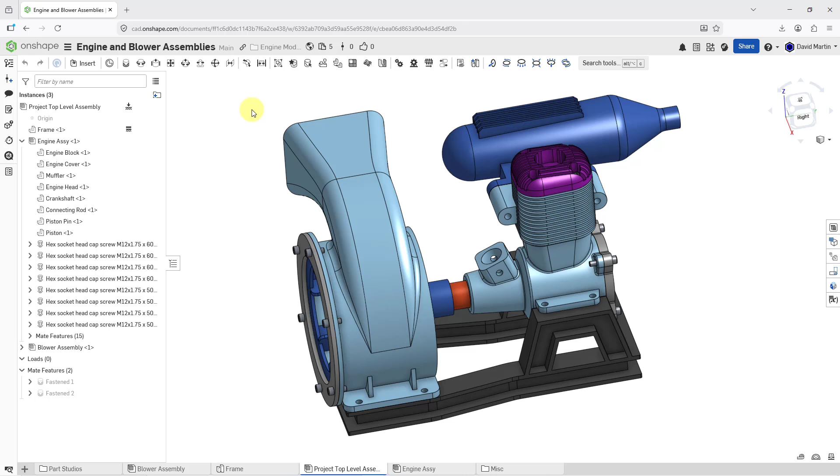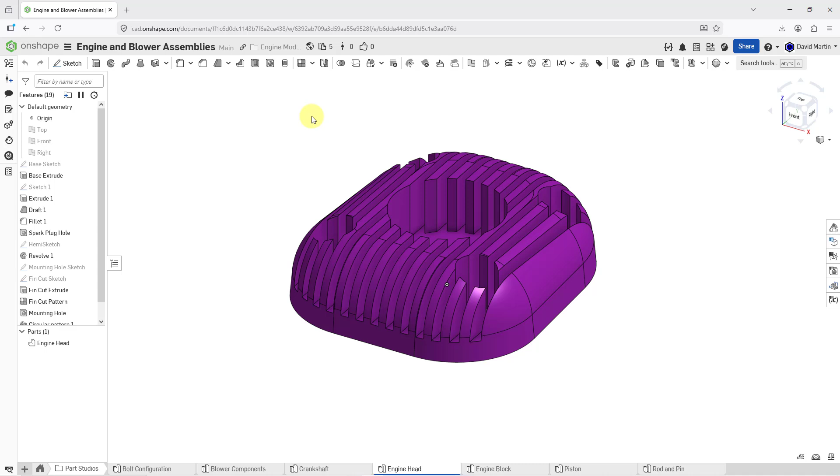So the first thing that I need to do is go to the part studio that contains the engine head. Let me go to my Part Studios folder at the bottom of the screen. Here is the one for the engine head. I will click on it. Now I am back in the environment. And so let me turn on the display of my planes, and so that way I can figure out what plane I am going to sketch on.

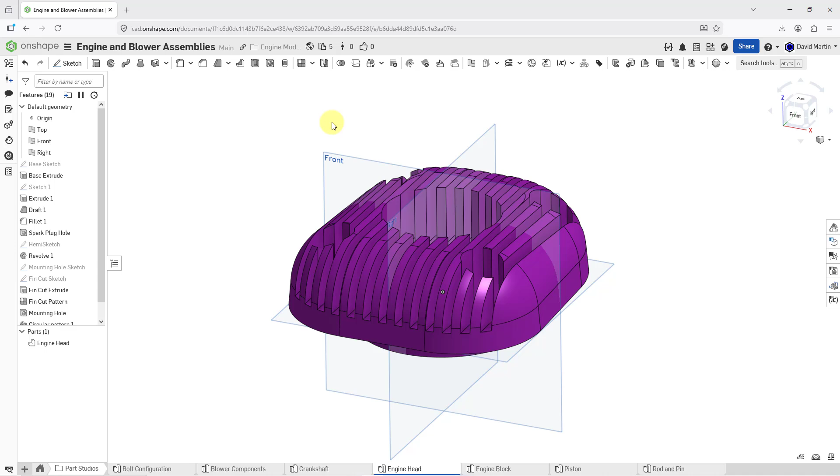And by the way, this part's going to be fairly easy. It's a couple revolves and extrude, some chamfers, not too much involved in this. But for the first feature, let me make the engine head a little transparent. That'll make it easier for me to see inside. And then I will select on the plane called front, right mouse click. Let's create a new sketch. And then I am going to view normal to the sketch.

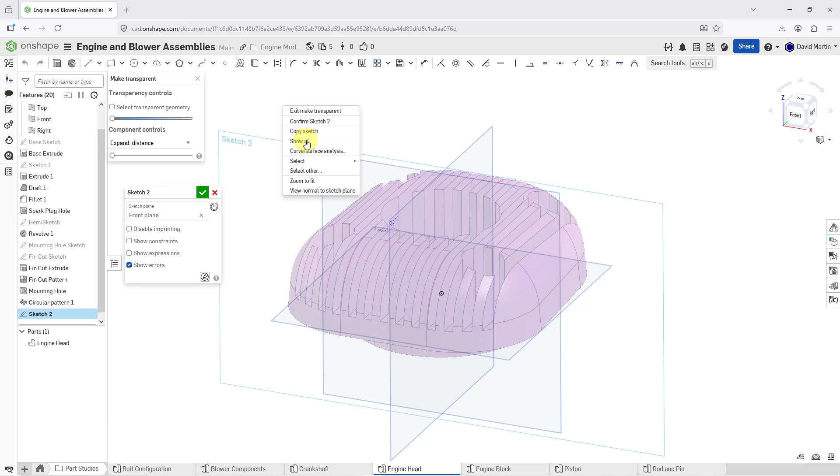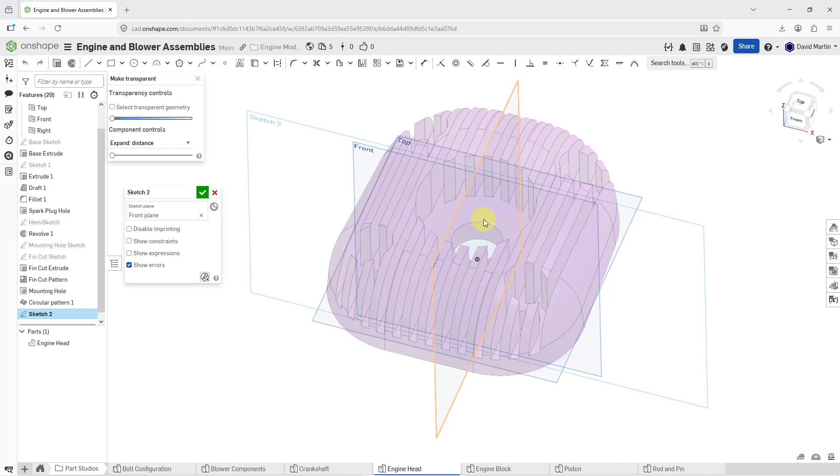And so the engine plug is going to go in here, and I need a surface that's going to end up being level with where the bottom of the cuts are. If I rotate the model, you'll see that the bottom of the cuts is the same surface that the hole is in over here. So let me go to view normal to my sketch plane.

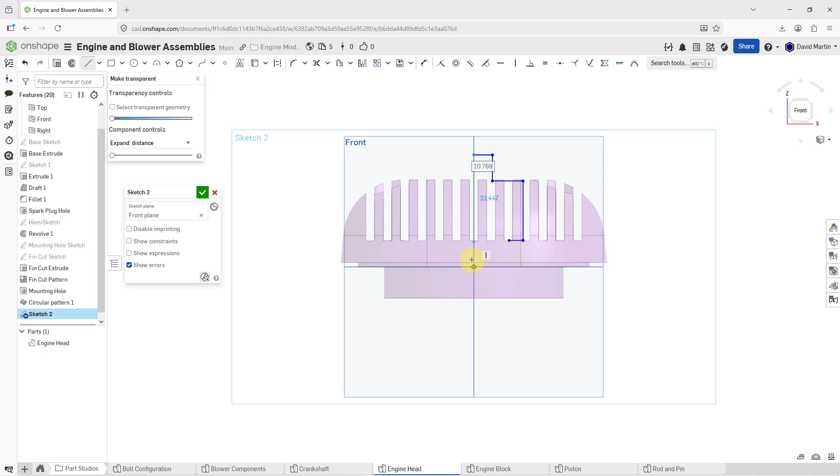I'm going to sketch a bunch of different lines. Let me click on the line tool, and we need a horizontal line out over here, and I'm just going to eyeball it. I'll add some constraints later on in order to put it in the right place. And then this is going to go up a little bit, then this is going to go in, and we're going to have a narrow top, and then here, and then go down, probably about yay tall. And then to get it to lock into the first line, I'm just going to hover my mouse over to give it focus, and then I can left click and then left click again. Let me hit the escape key to get out of line creation.

And this is going to be revolved, so let me throw in a center line. It'll also help with some of the different dimensions I want to create. I will go to construction mode. Let's create a line, and I'll let it snap into the origin, and I'll just make it vertical, and then hit the escape key. I'll also use the keyboard shortcut P to turn off the display of my planes, just to make everything a little bit easier to see.

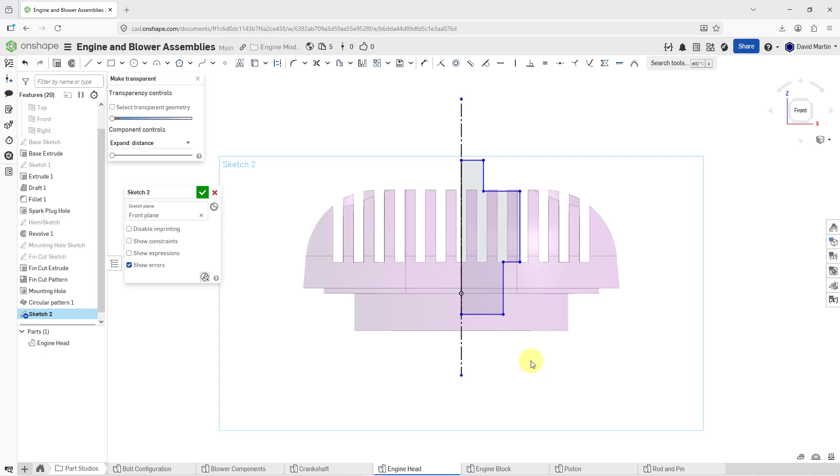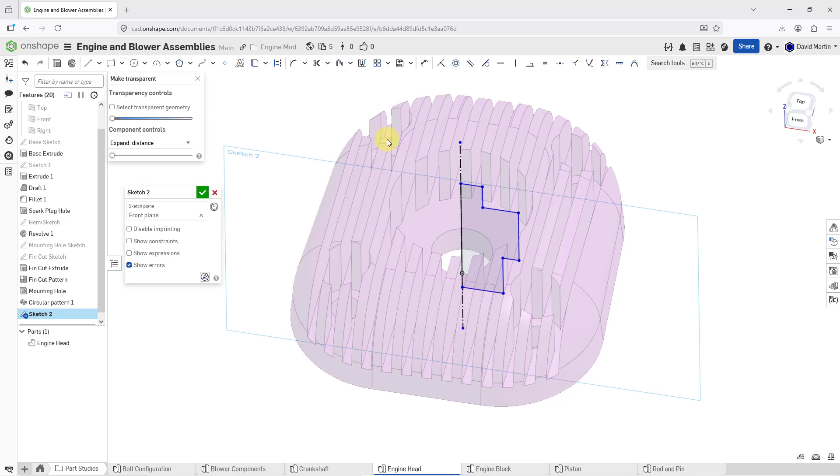The next big thing I need to do, let me throw in a coincident constraint so that this line lies in the same surface as here. Now, one thing you'll note, if I try to go to coincident and pick the line and then the surface, I'm not getting anything, and that's because I'm in transparent mode. Let me hit the escape key once more. I'm going to turn off transparency for a moment. That is really quite a bright purple.

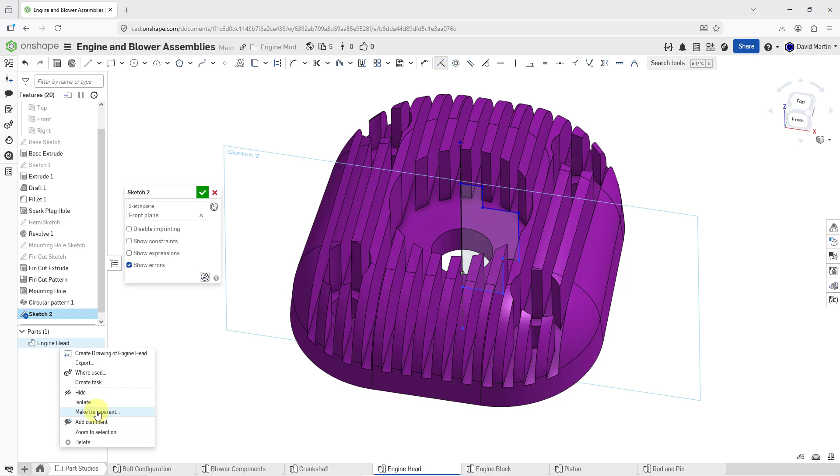Let me go to coincident and then pick the line again. And now you'll notice the surface is highlighting. So that is good. Now I can right click on the engine head and make transparent once more, and right mouse click and view normal to my sketch plane. Let's throw in our dimensions.

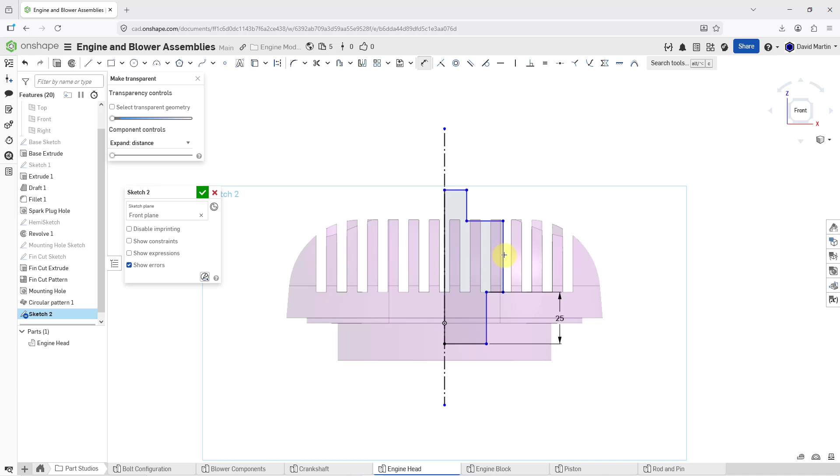So for the different dimensions, I need the height of this line. This is going to be 25, and I got it almost exactly. I wasn't even paying attention to the values. This one is going to be a height of 30, not so close there. And then the overall height, this line, is going to be 72.5. And now we need some different diameter dimensions.

And so for the diameter dimension, I'll pick this line and then the center line. And by moving my mouse over to the left, here I'm getting the diameter dimension. This is way too big. Let's change that to 14. And then down at the bottom, let's click this and then the center line.

And then my dimension here is going to be 30. And then the last dimension is going to be the width here. Pick the line, pick the center line, move out to the left. And this is way off. Let's see, that needs to be 37.5. And that is good. So that is the basic shape.

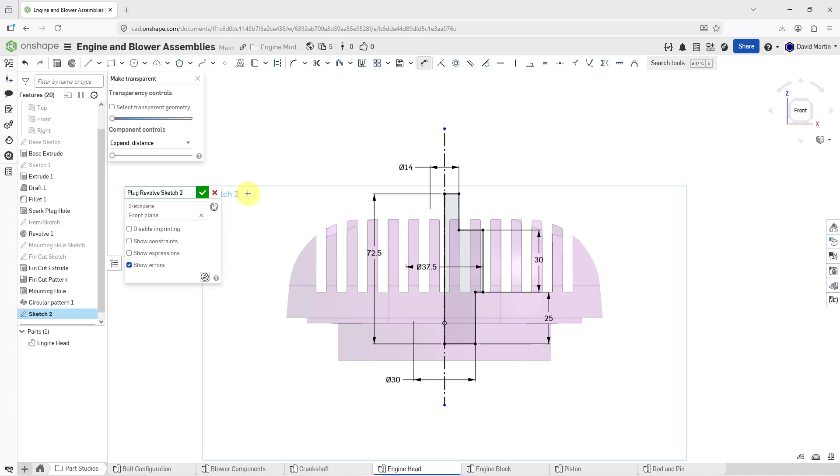Let me edit the name of the sketch. If you take a look, I've got some of the features named in here, but I could have done a better job. Let's hit the pencil icon. And this is going to be, let me call it the plug revolve sketch. And get rid of the number 2 on the end there. Hit the check mark. And so this is good.

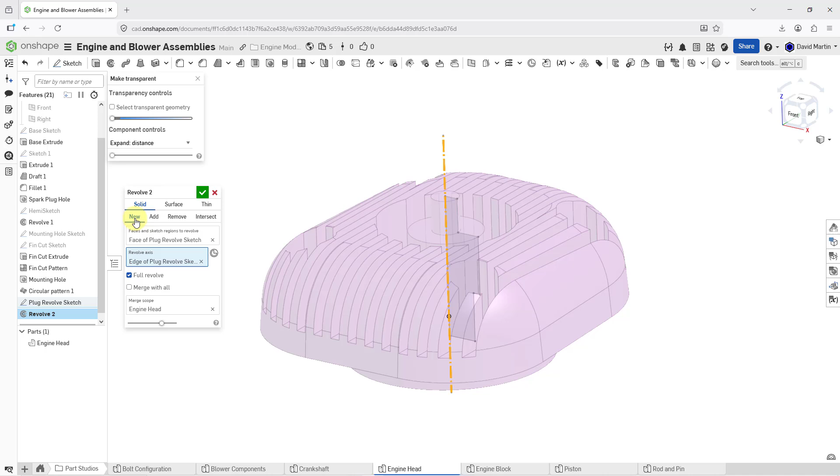Now I can click on the revolve tool. And for what I want to revolve, let's select that face and then click in the field for revolve axis to give it focus, and then click in here. And right now this is going to add material, but this is going to be a brand new part. So let's change revolve to new. And now you can see what the new geometry is going to look like.

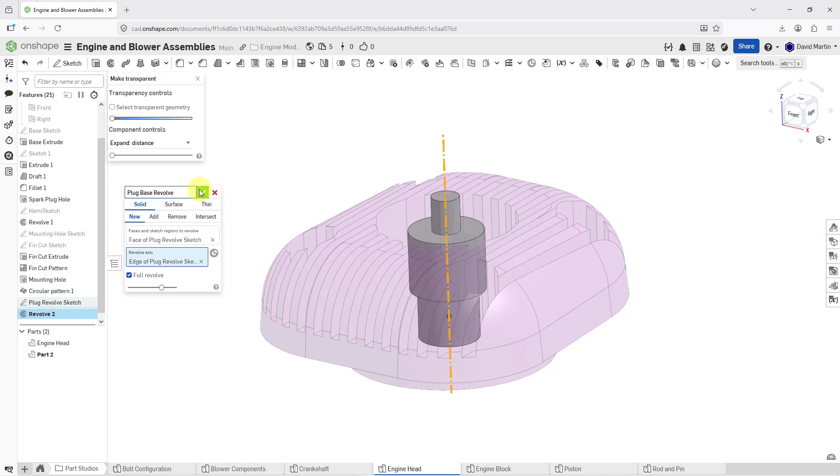And let me hit the pencil icon, and we'll call this the plug base revolve. Once again, I can get rid of the number on the end there and hit the check mark, and so I'm happy with that. I don't need to see the engine head, so let me hide it entirely. And let's select our part 2 in the parts list, and then with the right mouse button, I can choose to rename it. I'm just going to call it plug. All right, so that is good for my very first feature.

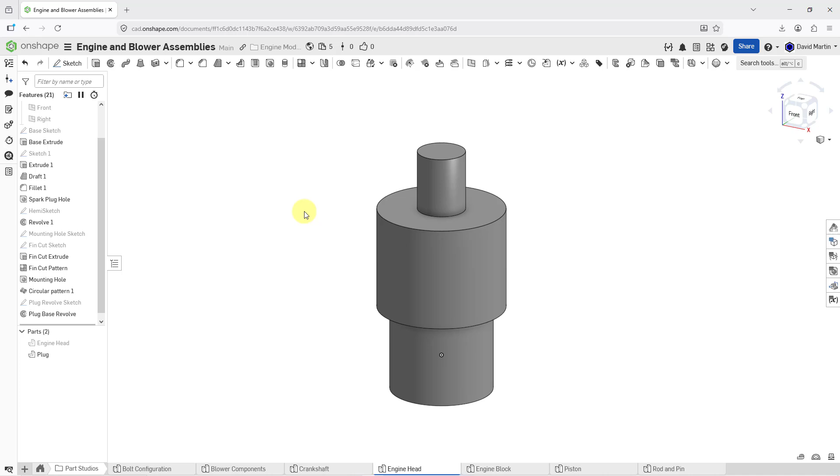And now there's going to be a hex feature about over here. Oh, I can turn off transparency since I hid the component. And so for my sketch plane, it's going to be right about over here. Hey, let's just jump into creating the sketch. And then I'll use this icon to create a mate connector on the fly. And let me click here to start it. But again, I want it to be up a little bit.

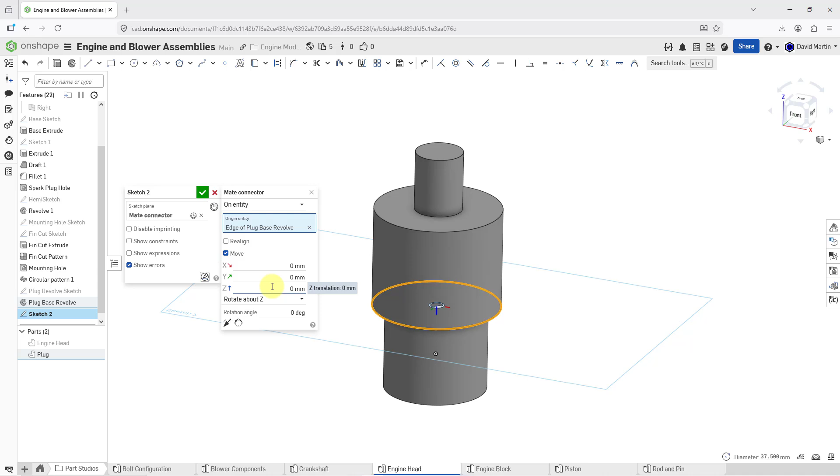So let's go to the other little mate connector icon in the sketch plane field. This allows us to edit the mate connector. And I want it to go up 10. So let's see, let's change this to -10 and hit the enter key. That is good. Let me hit the X to get out of there. And then I can right mouse click and view normal to the sketch plane.

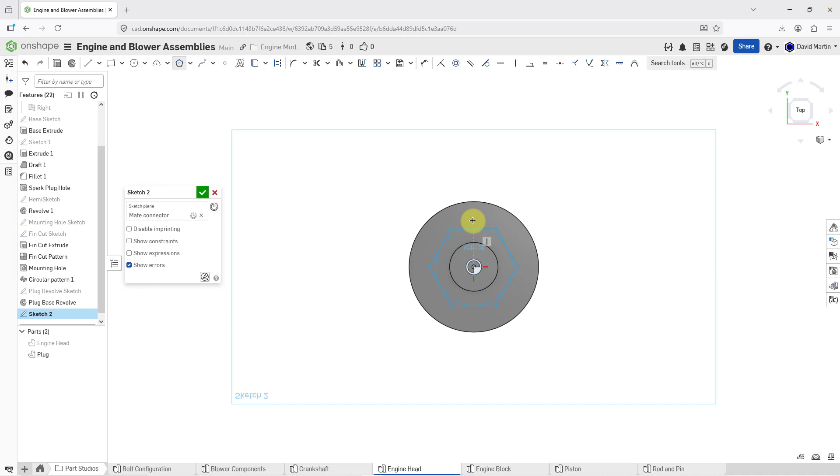And this one, we're going to make a polygon. It's just going to be a hex shape. So let me go to the drop down, and we'll use the circumscribed polygon for the dimension that we want to control. Let me locate it right on the center and drag it out. And here we have it. Let me left click and then make sure I'm getting 6. There we go, 6. That is good. For this diameter dimension, this is going to be 40. And everything is good here.

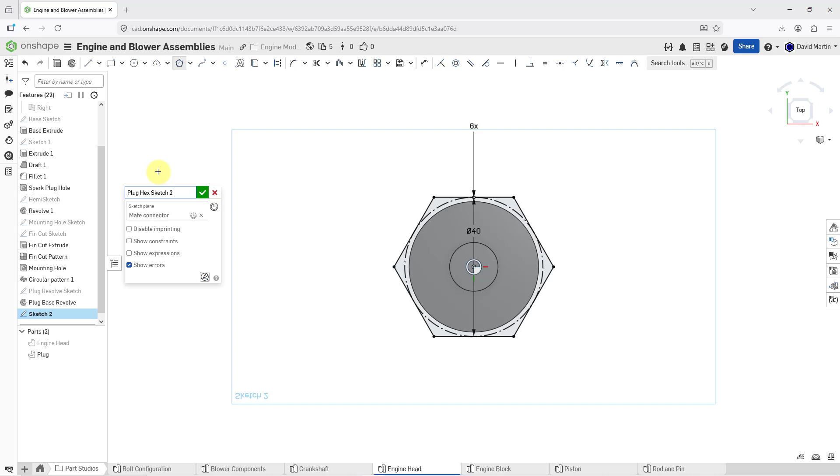Let me edit the name, and I'll call this the plug hex sketch. And then get rid of the number on there. Hit the check mark, and let's rotate the model. And I'm going to pan it over. For this, we are going to extrude. I'll click on the extrude icon and then select my sketch.

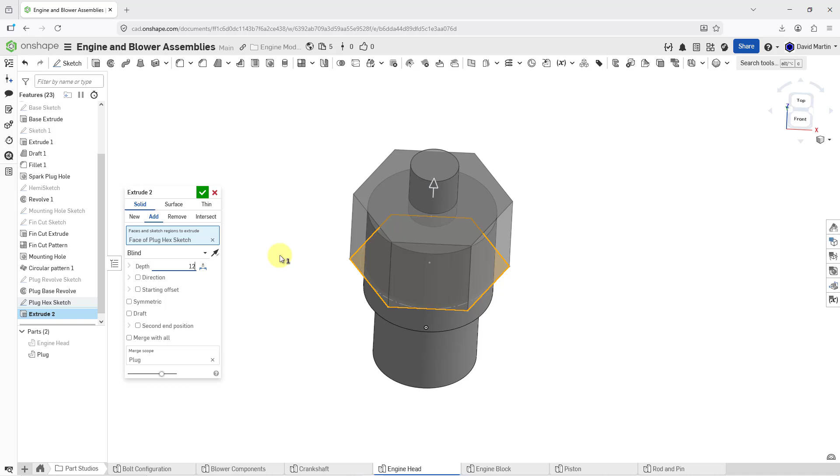Let's flip the direction. And right now, this is way too big. We don't need it to have that big a depth. It's actually going to be 12.5, and hit the enter key. So again, it's just going to go part way through the body in there. And so this is going to be my hex extrude. I'll call it the plug hex extrude. Keep a little consistency.

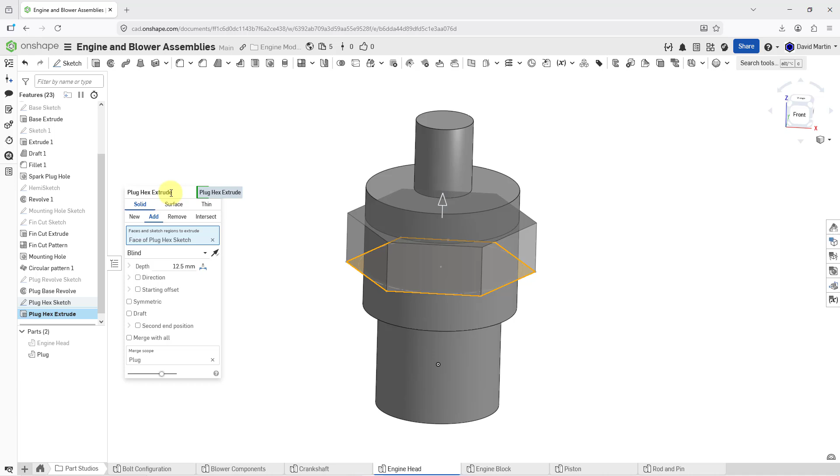And hit the check mark. And so that's good for the second feature. Down at the bottom, we are going to have a hole. So let's click on the hole tool.

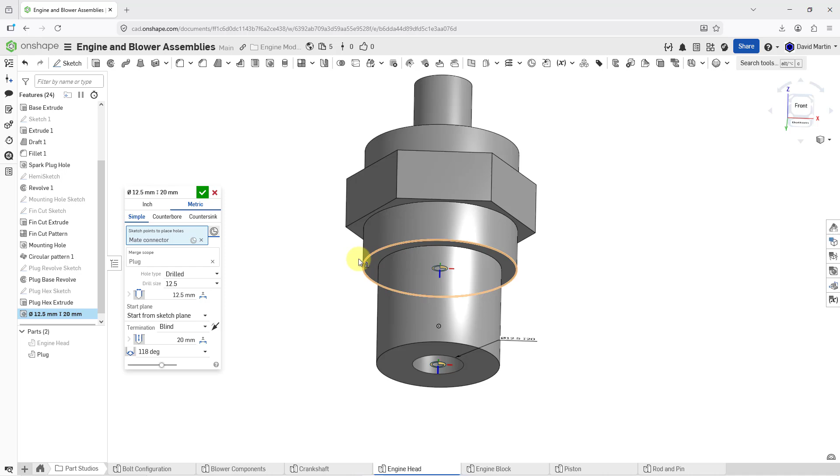And normally you select sketch points, but hey, you can also select mate connectors. And so I'll click on the mate connector. And let's grab right here, and let's see for the different dimensions that we want. We want it to be metric, and so it's going to be a drilled hole. And yeah, drill size of 12.5 is good.

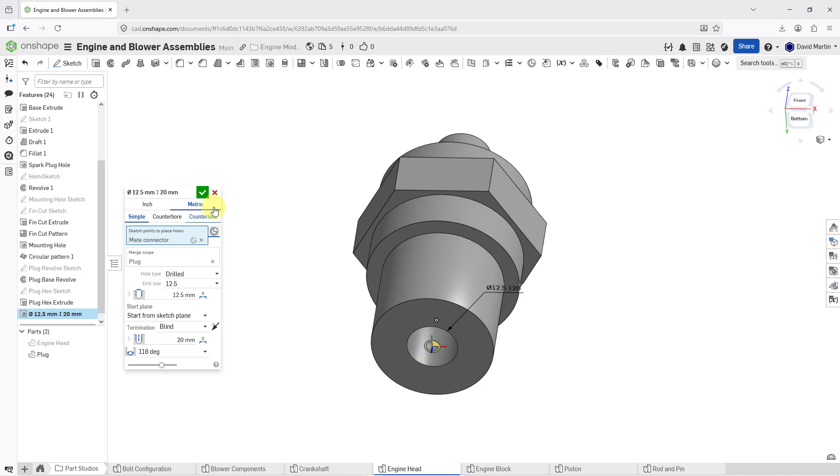Blind depth of 20. If you're wondering, hey, why are the values already correct as I went to create the hole? Well, I did a dry run right before this, and so it's using the same values from my dry run. So again, if you're wondering, hey, why are they magically the correct values that Dave wants to use? That is why. All right, let's hit the check mark in order to complete that.

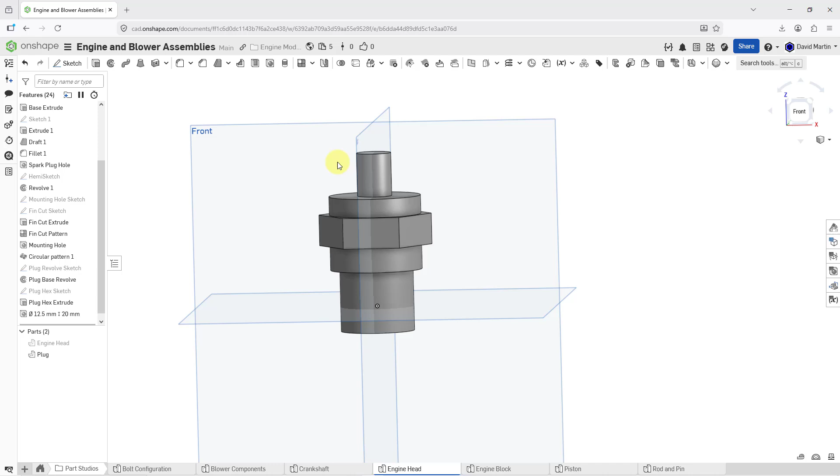And let's see, what else do we need? We are going to make a groove up at the top. Let me use the keyboard shortcut P to turn on my planes. Let me zoom out a little bit, and we can sketch right on the plane called front. I'll select that, right mouse click and hold, new sketch, right mouse click and hold, view normal to the sketch.

And let's see, I'm gonna put in a construction line, just so I can focus right in on the side edge here. So let's put in a construction line, or can I project? There, let's just project that. Now we have a construction line for me to lock in. I don't know if I had to do that, but let me use that method. That way I can lock right into the

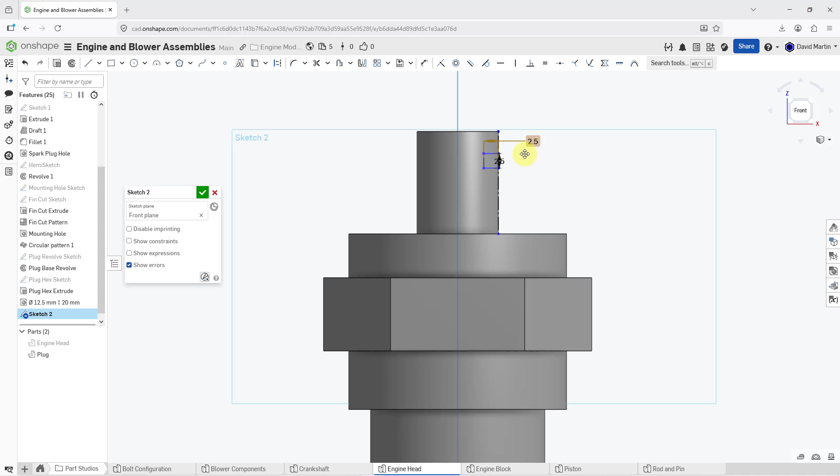silhouette edge there. And let me left click, and our dimensions for the groove are going to be 2.5 by 2.5. So I'll enter that, and 2.5, and hit the enter key. And let me hit the escape key because I don't want to create any other different lines. And I do want to grab my different dimensions and move them out of the way. Everything is in blue because we haven't located it vertically along the surface.

So let's create one dimension, the distance from here to here. And I'll just throw it all the way out of here so it's out of the way. And punch in a value of 5. Everything is black, so that is good. Let me once again edit the name of the feature, and this will be the groove sketch. And hit the check mark.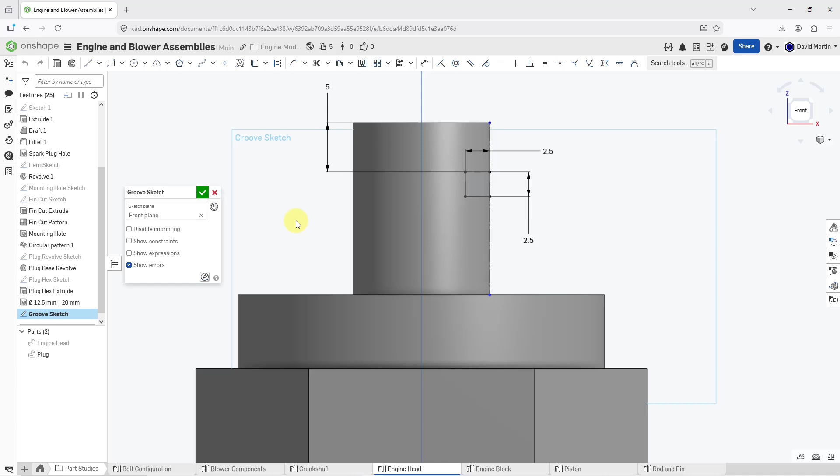Oops, you know what? Did I put in a center line? I always like to have a center line in there. Let me right click and then edit. And just want to zoom out so I can see my origin. Let me go to construction, create a line, let it snap to vertical. I always like to sketch it so that it is going all the way through the part. And so now I can hit the check mark.

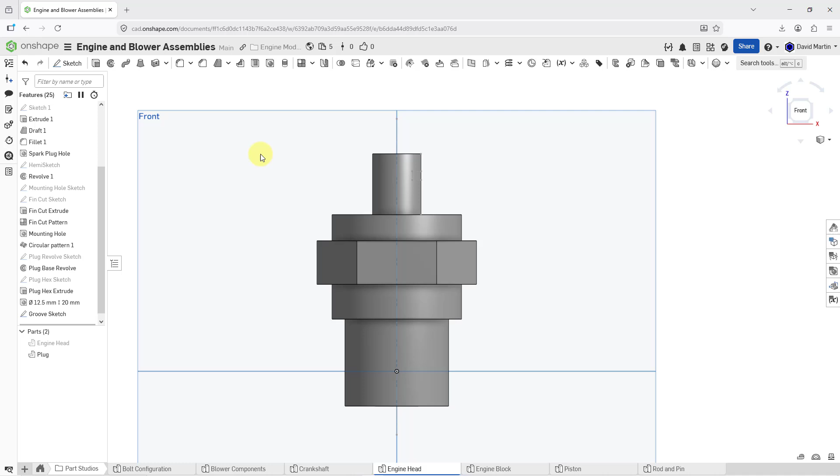And so let me rotate the model, and let's use the keyboard shortcut P to unclutter. And then we are going to revolve, and let me just select the groove sketch right out of the screen for the revolve axis. Let me click in the field and then pick it. And right now it's saying, hey, Boolean resulted in no geometry change. That's because we need to specify that we want to remove material. And now everything looks good there. Let me edit the name of the feature once again. Let me call this the groove revolve cut.

Hit the enter key. And you might want to just verify that the merge scope is just the plug. It should be, but just make sure it is. And then hit the check mark.

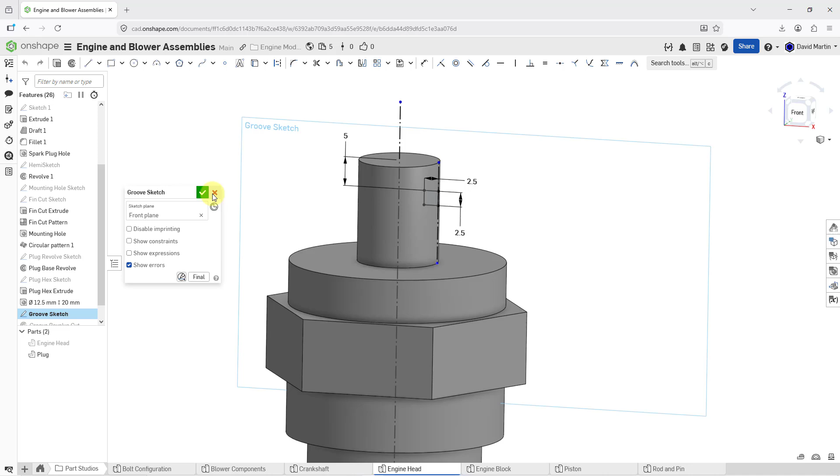Now, one thing to note is that we're actually going to have two different grooves in here. And originally I thought, hey, just put both of them in this one sketch. But I always like it to be as parametric as possible so that I can have different potential changes later on. And so rather than just creating both rectangles in the same sketch, hey, maybe one day I might want to have 3 groove cuts, you know, or some other different thing, or maybe change the location of the first. I don't know. I just want to be parametric.

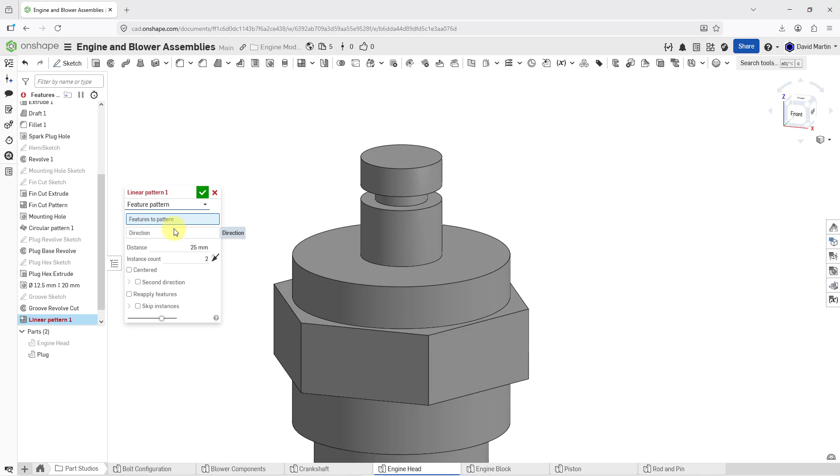So I'm going to throw in a linear pattern. So I'll go to that, and let's change from a part pattern to a feature pattern. And for the features to pattern, I'll just pick the groove cut. For the direction, I can pick the top surface here. And let's see, the distance right now is way too big. It's putting it out in space.

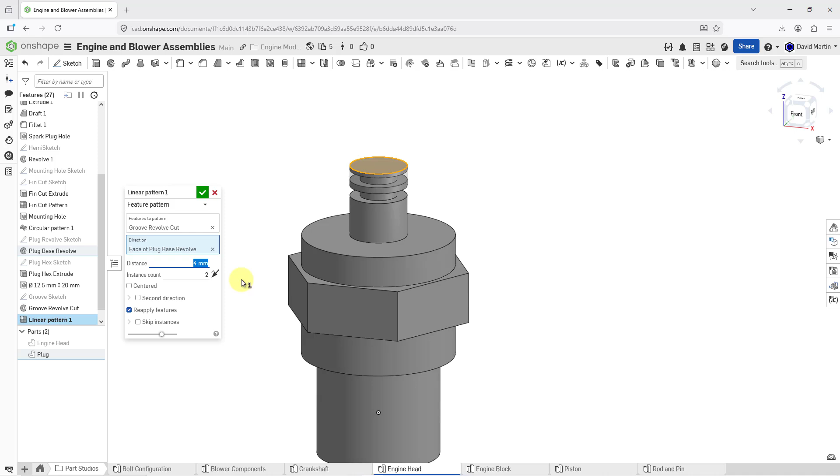So let's plug in the value here, and this is going to be a value of, I don't know, -5, -4. I don't know. Let's try that. -4, and let's try reapplying the feature. Oh, 4. There we go. And opposite direction. There we go. That's the button I want to do rather than doing a negative value. Sometimes you forget these little things.

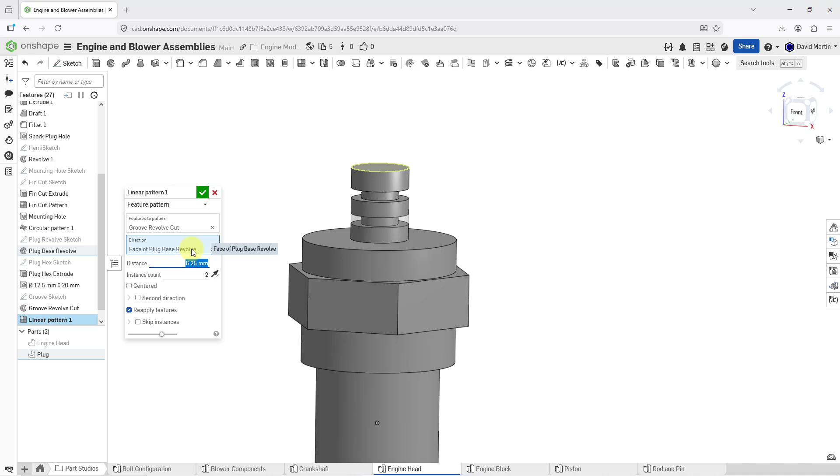And I don't like that distance. Let's change this. Maybe try 5. Let's make it 7.5. Nope. I'll split the difference. There we go. That's where I want to throw this in there. So I'm happy with that. All right, let's hit the check mark in order to complete the pattern.

And then the last thing that we're going to do is finish this off with some chamfers. Let's click on the chamfer tool, and I'll start out with the bottom edge. Let's just go for the bottom one. Let's just do equal distance. And right now it's a value of 5. Let's make it 2.5 instead. Just want a little bit of a chamfer down there at the bottom. So that is good for the first chamfer.

For the second chamfer, let's go and do the top edge. And so let's go to chamfer and pick this very top edge. And instead of equal distance, we're going to do distance and angle. And it's using a value of 2.5. That's good for the value, but let's change the angle to 30. There we go. That is good for chamfer 2. Let's hit the check mark.

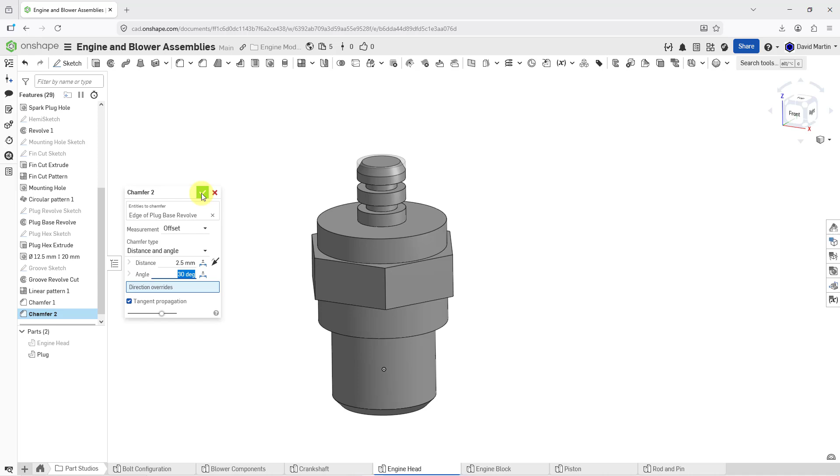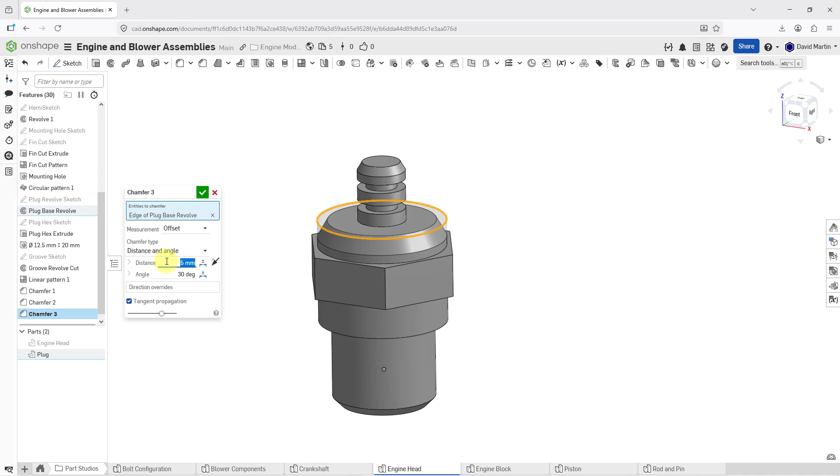And we're going to put one last chamfer in here, and that's for this big round edge. So let's go to chamfer and pick this one. And we're also going to do 30 degrees. But we're going to make this a bigger value. Let's make this a value of 5. So that is good for that one. And hit the check mark.

And so now we have everything that we need in the plug. Let me bring the engine head visibility back so we can see both of the components. And while I'm here, let's hide the display of the origin. So now that I've got my new component, let's go find our engine assembly and throw it in there.

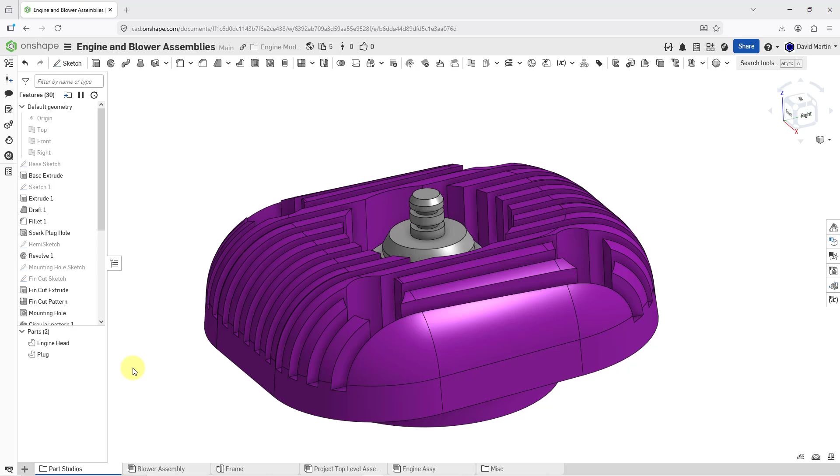So let me go to the home icon. And where is the engine assembly? And now we are going to assemble the plug in here. So let's go to the insert command. And we're in Part Studios. Here's the engine head Part Studio. And I'll select the plug. I can see the default location is putting it sort of like in the middle of the engine block. So I'm just going to go and drop it right about here and then hit the check mark.

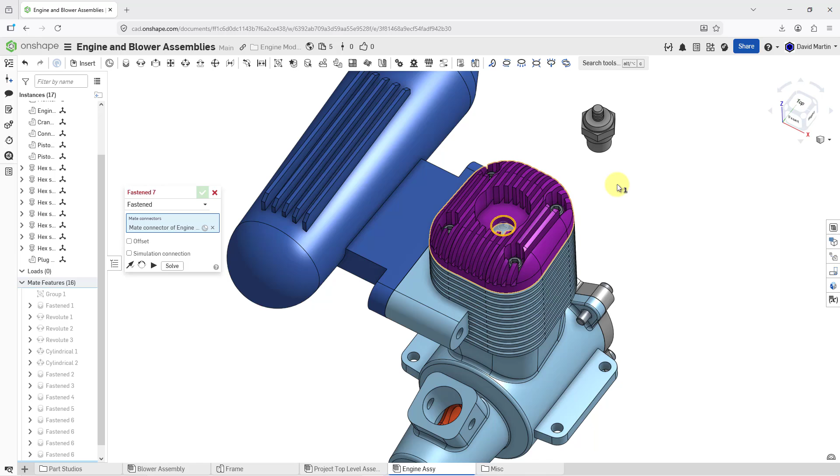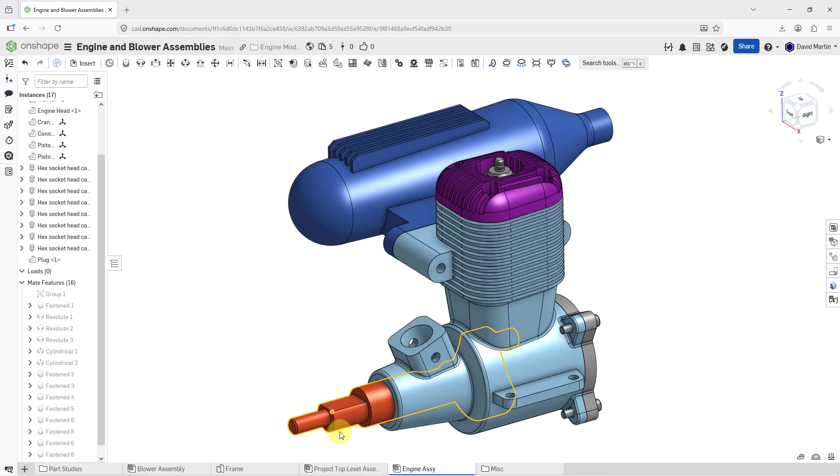Now we can put it where we want by using a fastened mate, and we'll pick this location from the engine head, and this location from the plug, and that is good to put it in the right place. I'll hit the check mark. So that is good in the engine assembly. And of course, if we hop over to the top level assembly, we can see that it is located there. It took surprisingly long to create that part. It's got a few different features, but now we have the project closer to being complete.